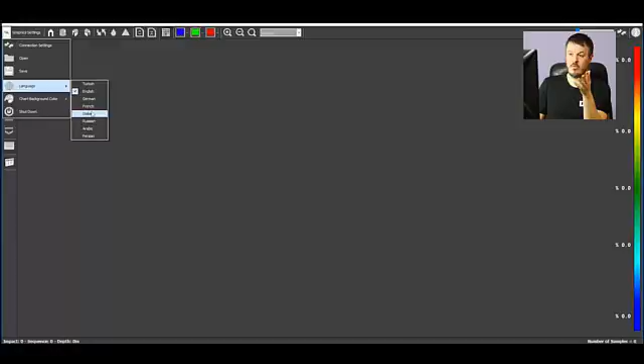Connection settings. Okay. You have to select the number of columns you want to scan and also the number of rows. And you see, it makes a grid. Each square measures 30 by 30 centimeters and it's a step. We always start on the lower right hand corner.

And then, very important, you have to choose how you're going to scan. You choose to scan either parallel, you go like this, then you go back, then again. Or you can choose zigzag. You see, you start here, you go like this, you step back, you scan, then like this, like this.

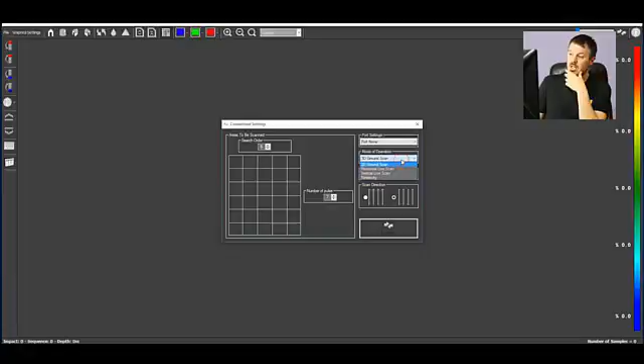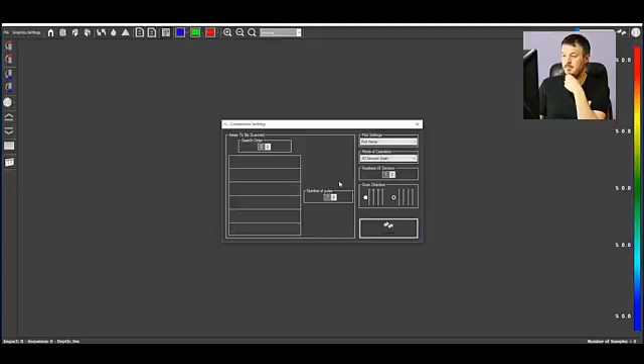Then you have to choose which kind of scan you're going to do. 3D ground scan is what you use for all our radar series. Okay? Horizontal live scan and vertical live scan are used only with X1, X5 and X1 Pro. And resistivity is for IRS or the resistive feature of X5. But here we're going to use ground scan. And then you just press connect.

We would like to remind you that on each DRS device you can choose manual or automatic scan. For automatic scan, the machine will beep. So every beep, you will make a step. So it goes beep, you make a step, beep, you make a step. It gives you a rhythm. It's a very nice feature. Or you can use the manual feature. With the manual feature, every time you make a step, you just press the joystick. Okay?

Now, let's see the file. We've just recorded an iron object. Here it is. Let's start with 2D. You see, here you can see a red square, always on the lower right hand corner.

So basically, we've been scanning 1, 2, 3, 4, 5, 6, 7, 8, 9, 10, 11, 12, 13, 14, 15, 16 steps by 1, 2, 3, 4, 5, 6 columns. So 16 steps of 30 centimeters, that's barely 5 meters, by 2 meters.

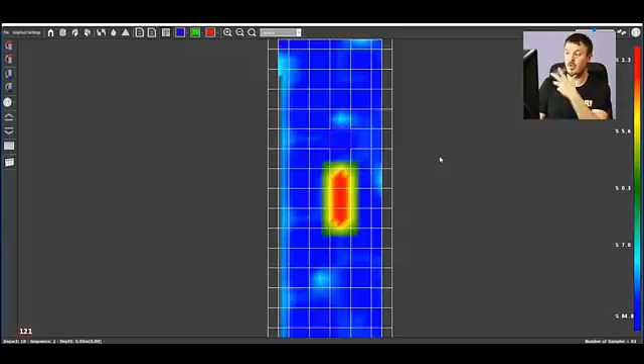So look, you can navigate like this with the keyboard, or you can also use this thing. There is an embedded keyboard here. Okay? But we will use this. Every time you move the cursor, you can see on the lower left corner that the value changes, 121. Now here, where the object is, we have 235, meaning that we definitely have a metallic object.

How can you make sure it's a metallic object? When you open a file, you can see on the right corner a scale of color. If the metallic object is red, yellow and orange, if the total of the first 2 values, see 2.3 and 5.6, where it's barely yellow-orange, if the total is below 10, then you can imagine this target is metal. Let's see, 2.3 plus 5.6, that's 7.9. So definitely red here marks a metal object.

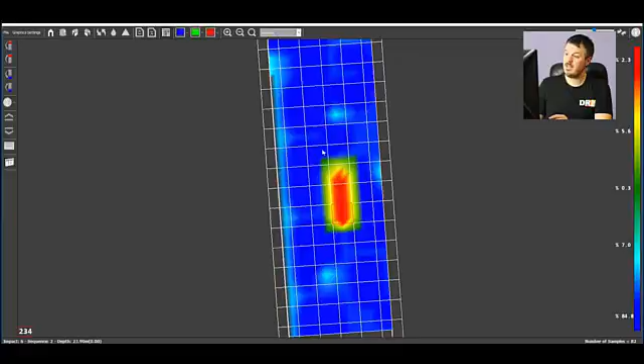But the blue, we say it's a cavity, but not always. It can also be a field that has been turned. So here we have 84.8 for the dark blue. If it is a cavity, it has to be 100%. If it's below 100%, it's not a cavity, it's just ground, okay? So here, 84.8, it's not a cavity. Here we have a metallic object, definitely, but it's not in a cavity, it's just in regular ground.

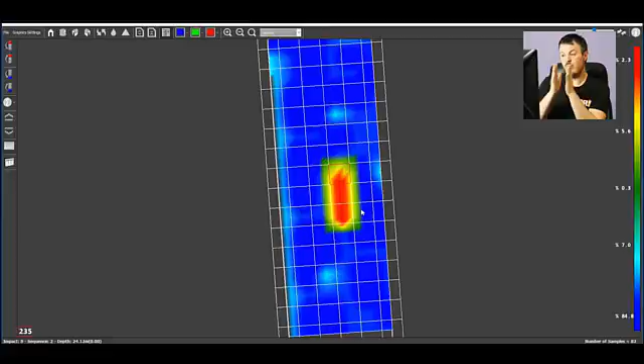How can we determine the size of the object now? Okay, we have 3 squares. 3 squares for the length times 30 centimeters, that's 90 centimeters, let's say 1 meter. Let's imagine the width now. The width is just 1 square, see. So that's 30 centimeters. 1 meter by 30 centimeters. The buried object on our field test is basically an old rusty pipe, okay?

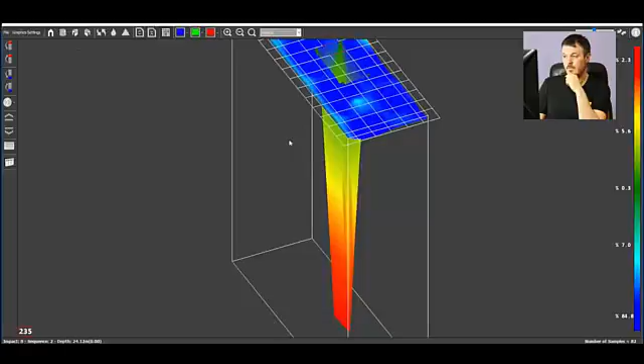Now let's try to imagine what kind of depth we have here. Okay, so let's go 3D. You can see the depth is here. The first thing you have to do when you open your file is tell the software which kind of soil you've been scanning. Here we use sandy, okay? Remember that the percentage of humidity, the type of ground, whether it has rocks or not, will really influence the result you get on the software. So sandy is pretty neutral.

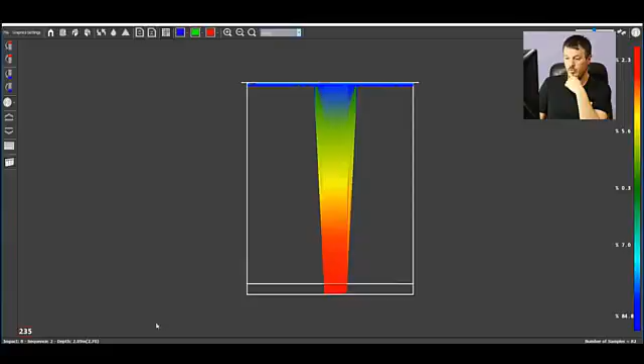So let's use these 2 arrows on the left of the software to determine the depth. So the object starts around here, 2 meters, you see 199, and goes to 270. So our metallic pipe is between 2 meters and 2.70 meters deep, okay? Since it's a pipe, it's round, it's 30 centimeters wide, so it's very good and it's accurate. So you have a 30 centimeter pipe between 2 meters and 2.70 meters deep.

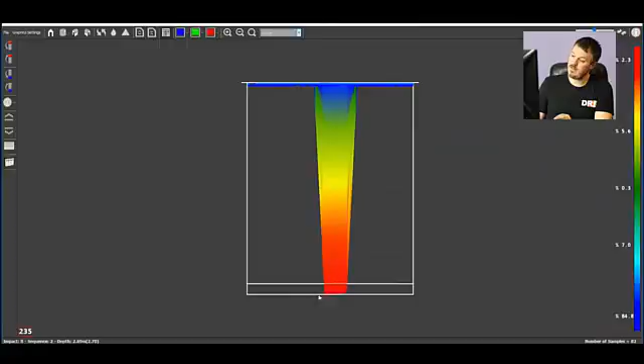Very interesting here, you can see that there is a very visible cut. When the red is cut like this, it's metal, but most of the time it's iron. When it's cut like this, it's iron. It means that the signal has been cut. And you have a really high chance that this is iron.

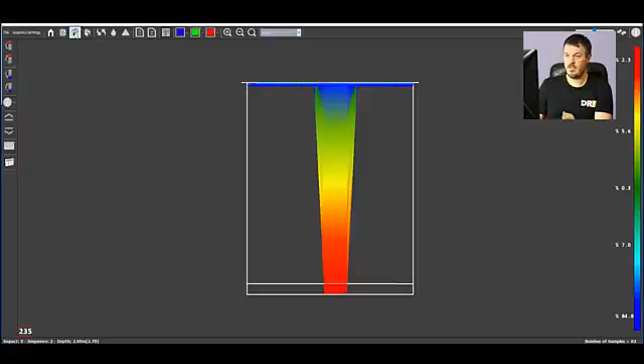Finally, we'd like to show you this. Let's get back to 2D, you will see here. You see here we move the cursor and you see the object is here. You see it's still moving here. Our object is here and you can see the value here. Look, 235. Let me show you. If we get back to 2D, okay, let's open this. You see it's here.

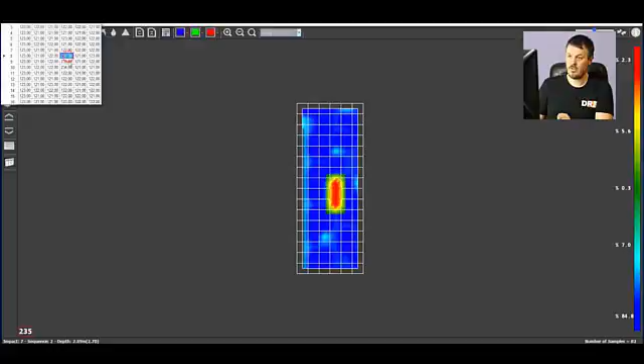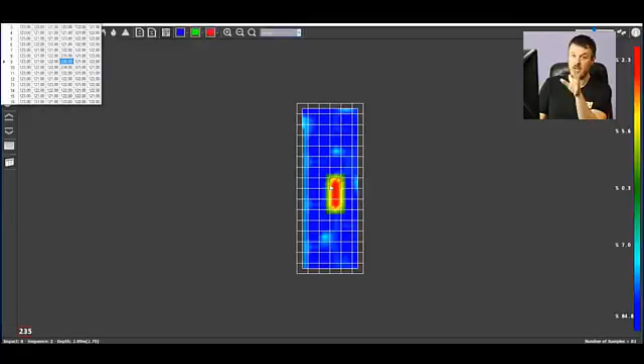Our value of interest is 235, 235, 235, 234, and it's row number 4. 1, 2, 3, 4, you see, and it's step number 10. Basically, it's here, you see, so it's perfect. You see the value here, 235, that's our metallic object, and you can see the scan values appear and are interpreted directly by a color in the software. So you see, it's very, very neat. You can determine the size and the depth of the object, thanks to our DRS 3D software.